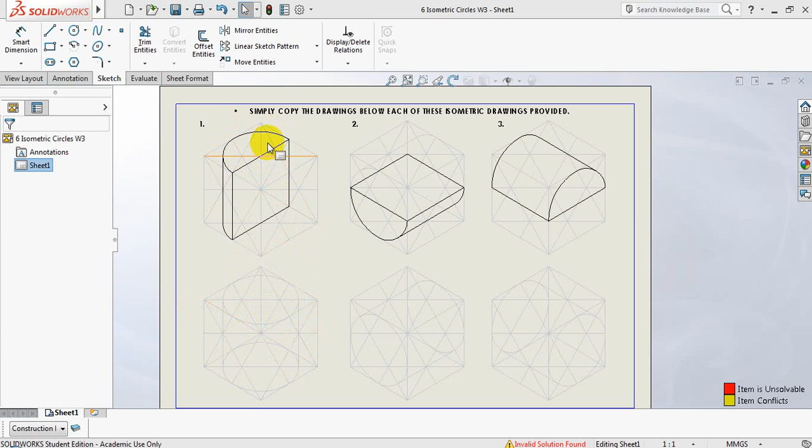Once you have found the entire cylinder, which also fits inside of its own box, or in this case the cube, you will then have to go and look at the actual shape given to you and decide which arcs you are going to be using to present as a final drawing. And number 1, when I zoom in on number 1, I'll realize that I've used the entire arc of my isometric circle in this end over here.

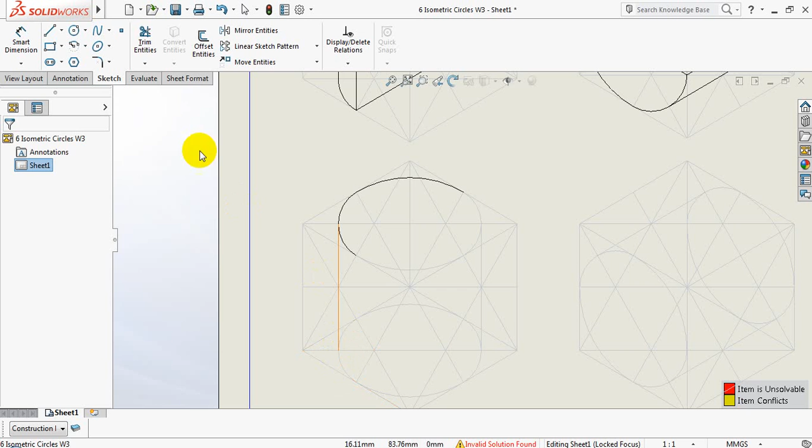Once you have constructed your cylinder, you could simply go ahead and start drawing in those darker lines. And yet again, you'll note that only a portion of this cylinder here is going to be used, because I'm only going to be able to see this portion over here in the front. This portion in the back, I'm going to simply trim away. And I'm only going to be using that portion. Right, this is taking shape now.

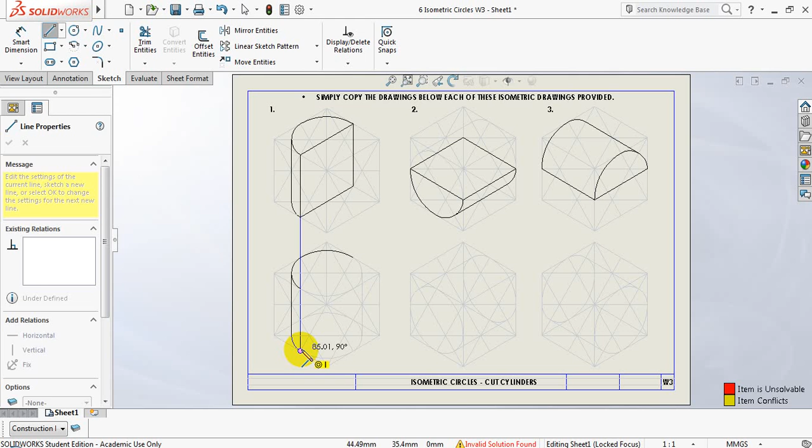If I look at number 1 again. Number 1 says that there's a line going from that middle to that middle. If I simply took a line and I constructed a line from here, I would notice that it actually lines up with that point there and that point there as well. I'm not going to do that from here though. I want to logically prove this. So I'm going to use my line tool and I'm going to be drawing a line from the center of the top isometric square to the center of the bottom isometric square.

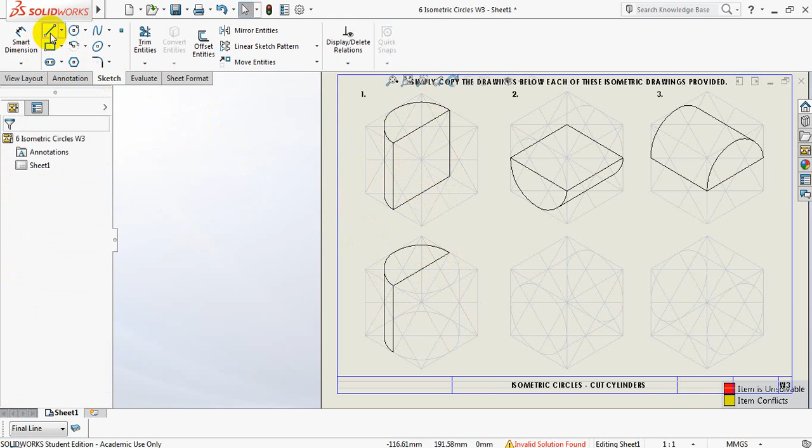Because we are simply copying the number, I'll know and can compare exactly what needs to be done. Your challenge from here on out will be to draw this entire shape without having the help of this, or having the help of being able to see this. We know that that line's going to exist. There it is there. And I also want to go from the middle of the top surface to the middle of the bottom surface. And all that's left will be that line. Right, number 1 is done.

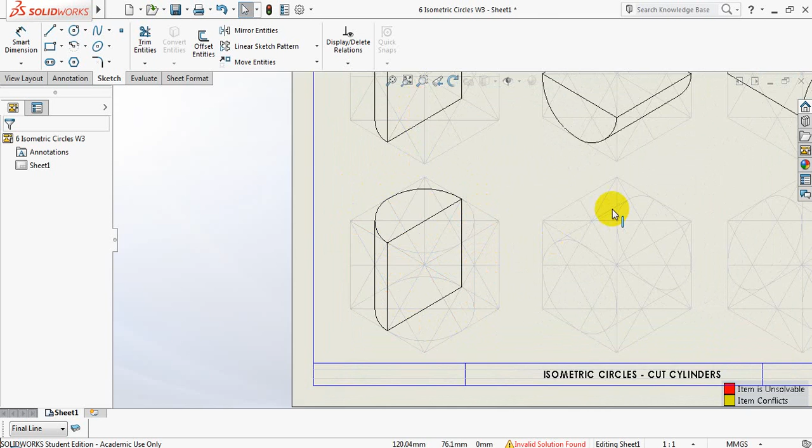I think the hard work is really to get the isometric cylinder in place and then selecting exactly where to draw from and to be able to get exactly the same half as in number 1. Let's look at number 2. Number 2 is directing in a slightly different direction. This is a cylinder lying down, drawn at an isometric angle. And I've done exactly that to my constructed cylinder.

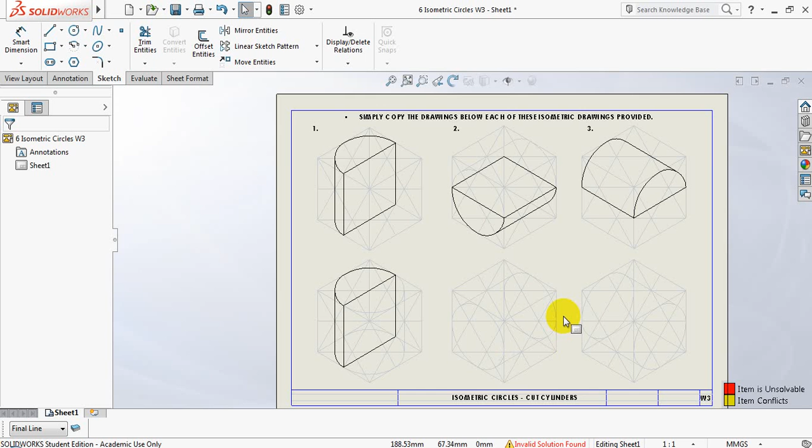Once I've drawn the actual cylinder in construction, I'm going to go ahead and select yet again which of the arcs need to be in final line. I'm definitely going to be seeing this arc over here and this arc over here. This line here, go change that to final line. Because that is the exact center of my isometric square, the front face, I'm simply going to be using my line tool, or in your case, you'll be using your 30-degree set square to draw this line from one point to the other, dividing that circle into two.

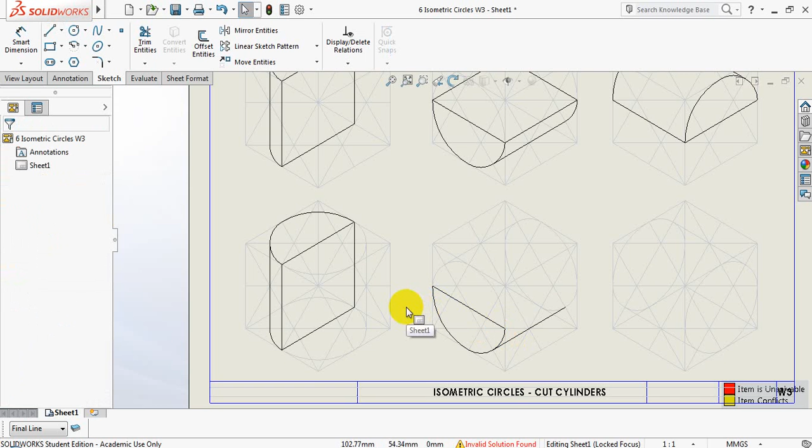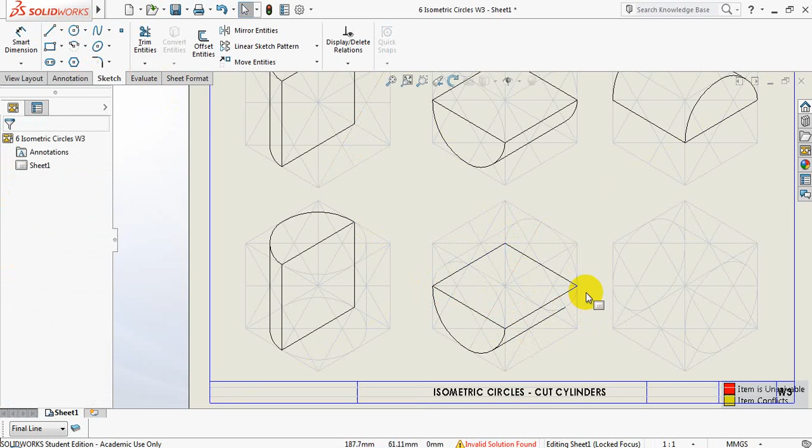You theoretically will have to divide the circle at the back into two as well, as we are having half a cylinder. And if you'd like, you could simply go and join the two lines, or the points, the ends of those lines. And soon this shape makes sense. Yet again, we have an arc that we're going to be using, this one over here, but we're only going to be using a portion of this line, or the arc.

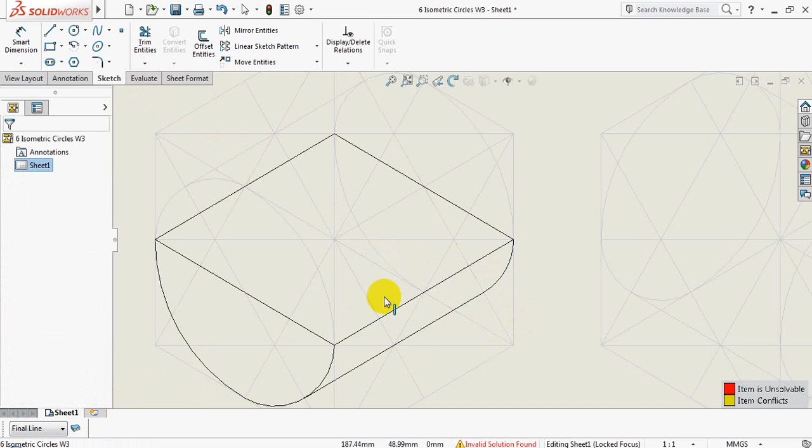So I'm going to use my trim tool, trim away this portion over here. You don't need to erase this, you just simply leave your construction line over there, and this will be the only portion that will be in a final line. There we go. Let's compare our shapes. Exactly what we needed. Right, our third and final one is facing into a different direction.

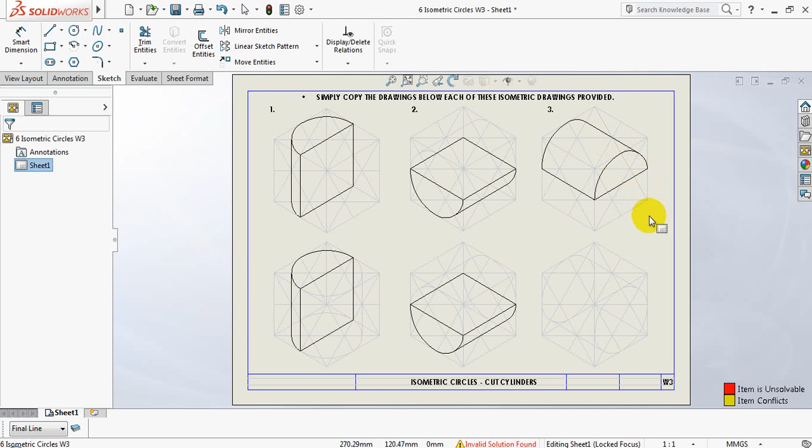It's lying to the right, and it's also lying on its side. Yet it's the top half of my cylinder, and I've got to select which of these arcs of my isometric circle I'm going to be using yet again. I've constructed my isometric cylinder lying in the correct direction, and I'm simply going to be selecting the arcs used. Right, I'm simply going to be cutting my front isometric circle into half, or into two.

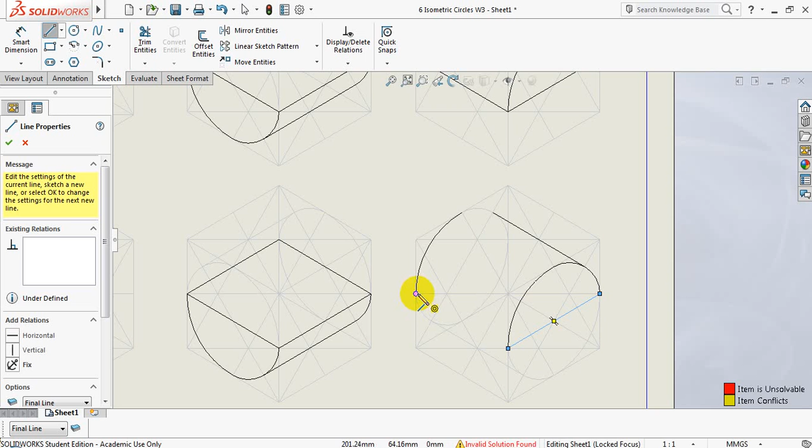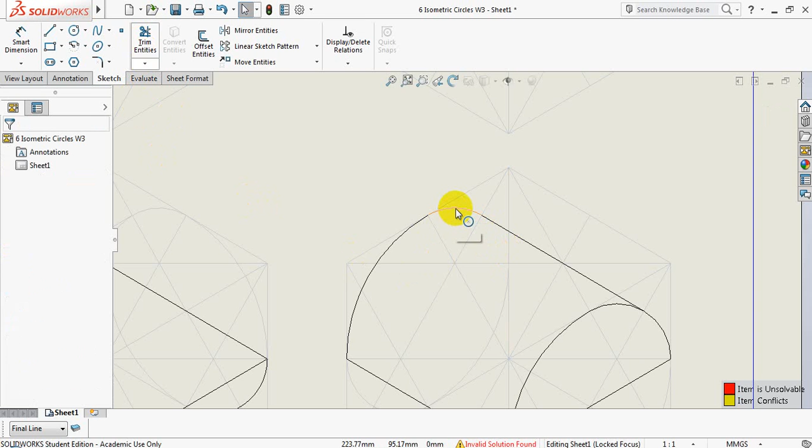And I'm going to do exactly the same on this side here. And yet again, I'm stuck with an arc that is a full arc, and I'm not going to be using the full arc. In your case, you're going to be leaving this construction line over here. I'm going to trim it on the computer, and I'm going to change the line type. Let's have a look at whether I have all three correctly drawn. I do.